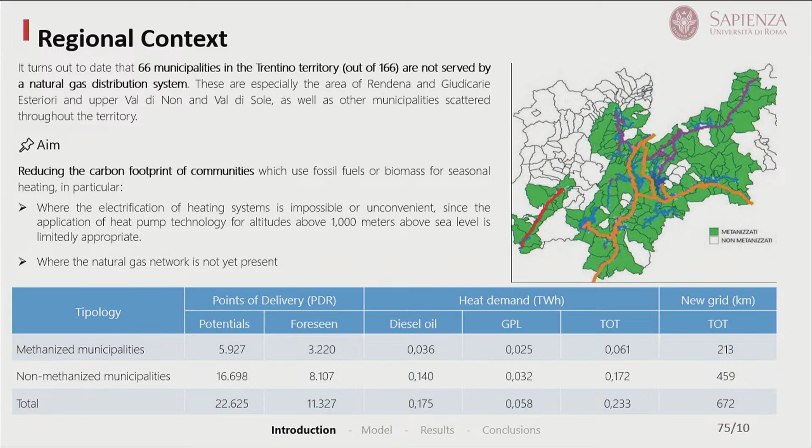So the idea was to try to examine the problem and try to solve it by using hydrogen. And then we started to make this analysis, trying to define different types of scenarios that could be pertinent to this type of problem, because in different town villages we have different problems.

So we started our analysis by examining the situation in Trentino, and together with the group in the province, we indicated 3 typical different scenarios that you can see here. I don't know if you see, okay. These are the 3 scenarios that we analyzed.

One is Peio, that is a small town where we have a number of different civil boilers, one per building. Okay, I don't know why it is going. I don't know if someone in the back is working on this. And in this case, the idea is, let's try to understand if it is possible to generate a grid, a hydrogen grid, to feed all the houses.

In the second case, we worked on Ronzo Chienis, that is another small village where there is a small network of natural gas, based on the use of liquid natural gas and then passage into the grid, where we examined the possibility to implement a sort of blending, 10% and 20%.

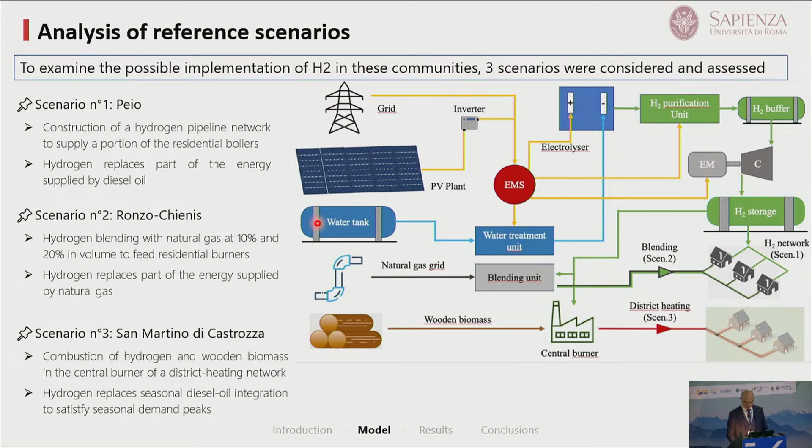We developed a model, a tool that was based on the implementation of a photovoltaic plant and a station for production of hydrogen and storage, together with the final uses. The idea was to try to establish preliminarily the demand of hydrogen in the 3 different configurations, and we did this starting from some raw data based on the use of the fuel in these 3 different scenarios. It was a long work just to extract and manipulate this data.

And at the end of the story, we understood that for the 3 different scenarios, we had different requirements in terms of hydrogen in tons per year with a different coverage. In none of the cases did we substitute completely the existing solution with pure hydrogen, because otherwise it could be very difficult to find the total amount of hydrogen.

So here you can see a number of relations on how we understood the need, and also how we produced the hydrogen. In the basic scenario we worked by using a photovoltaic plant, an electrolyzer, a low pressure buffer where we stored the hydrogen for the daily production, a compressor and high pressure storage, and finally end users.

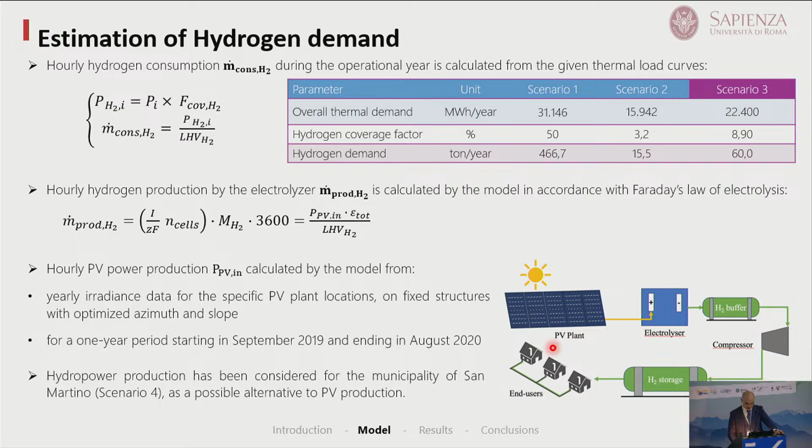In order to understand really what is the real need of hydrogen, and especially in order to understand how big should be the storage, we decided to develop a tool that was able to take into account from a dynamical point of view the production of hydrogen and the consumption. Of course, we can start just saying, okay, during the year I need 1 ton of hydrogen. I produce 1 ton of hydrogen, store it, and I use it during the year. But in general, we have a continuous production, continuous consumption.

So it is possible that the maximum amount of hydrogen that I have to store is not as big. So the idea was, okay, let's try to compute something using a time-dependent tool that is able to take into account the radiation that we have on the soil, and the production, and finally the end users.

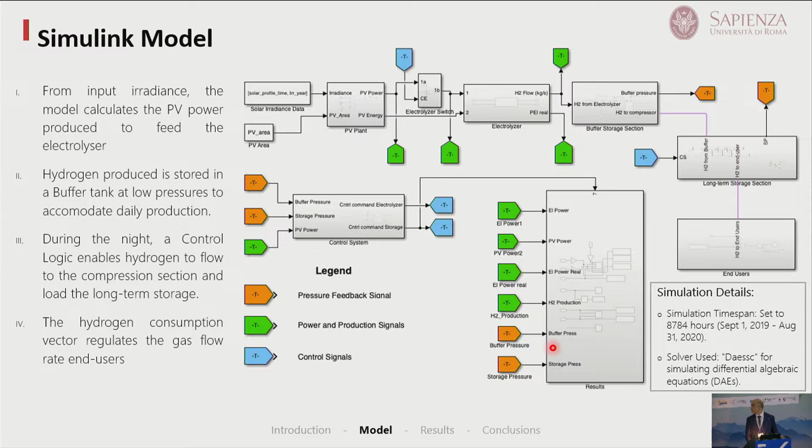So we developed this code in MATLAB Simulink, and on the basis of this, we were able to understand the characteristics of the different scenarios in terms of dimension of the power plant, the photovoltaic plant that was needed to be used, and also the capacity and the dimension of the storage.

It is possible to see immediately that in the first case, where we tried to generate hydrogen for the network, the quantity of hydrogen that was needed was really too high, and it was out of the possible application, because there is really a problem of producing a photovoltaic plant so big, 21 megawatts, but also to have this so big storage of hydrogen.

I see someone from the fire brigades here. I imagine that they are quite worried about this quite huge amount of hydrogen.

But at the end, what we have seen is that for feeding scenario 2 and scenario number 3, it could be a possible solution, provided that the local conditions were sufficient to support the economic effort. There is a big problem, and it is something that I want to point out. I discussed it with all of the people this morning.

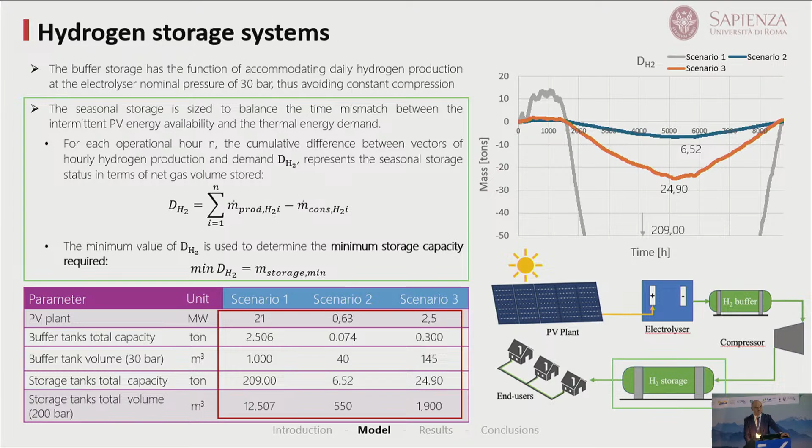The real problem is the use of an electrolyzer that is directly connected to the photovoltaic plant. If we do this, our photovoltaic system will work for a number of hours that is quite low. So we have very high capex cost. So we decided in a second step of the analysis to try to feed the electrolyzer also with some part of the

hydropower. So we examined 3 different configurations where we considered using part of the electricity coming from hydropower by assuming a number of different modulations based on the cost of the megawatt, the so-called PUN, prezzo unico nazionale, a unique national price of the electricity. When this PUN was above the threshold, all the production was given to the grid. Otherwise, part of the production could be used for producing hydrogen.

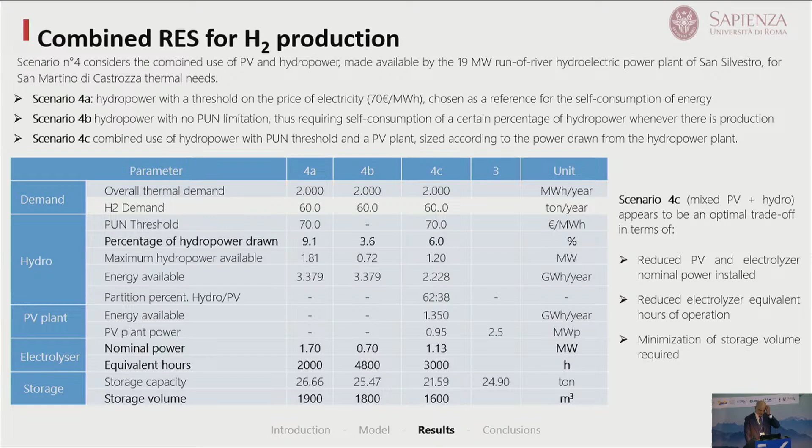So we analyzed a number of configurations, and what we have seen is that we were able to work in a more proper way, with use of the electrolyzer for a longer period. And so from this point of view, this solution could result in a better solution. So I don't know why it is this. Here we have some results that are related to other, let's say, emission scenarios and costs.

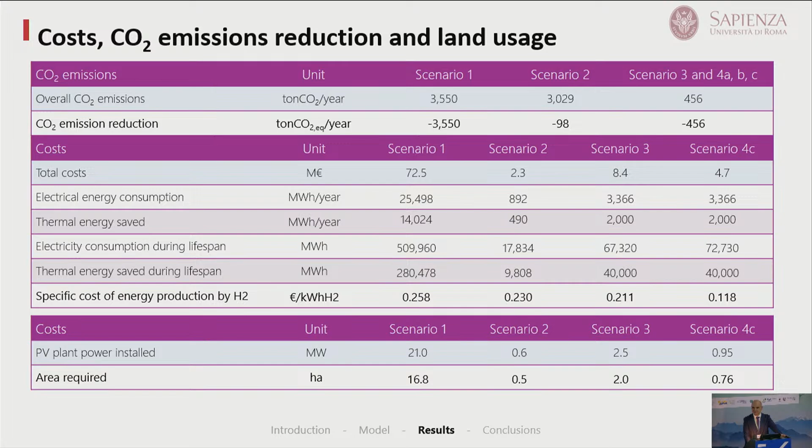So what we can say is that we analyzed the feasibility. We have very interesting results from our point of view. We developed this model that could be used in a huge quantity of applications. And we have this control logic algorithm that is able to take into account how to modulate the production of hydrogen and the use of the renewable sources in order to optimize costs and minimize emissions.

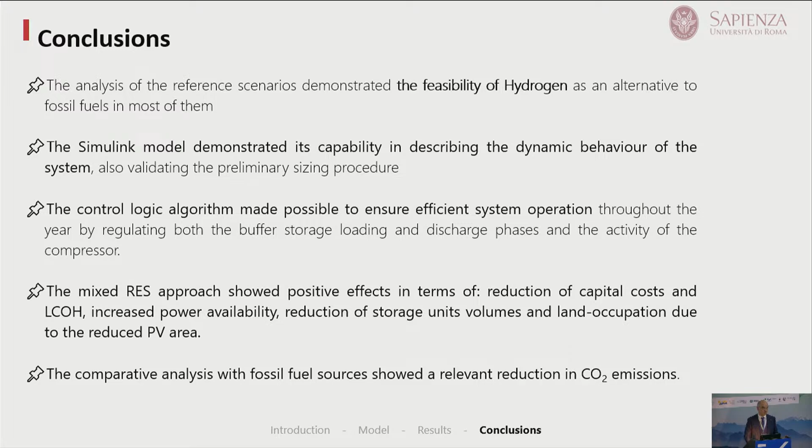I just want to spend a few words on the outcome that we have from this project, because after the development of the model, we understood that we probably also need an improvement of our model to take into account the problem of transportation of hydrogen, especially if we are considering the existing pipelines, where one of the big problems is that, of course, hydrogen has a density that is much smaller than natural gas.

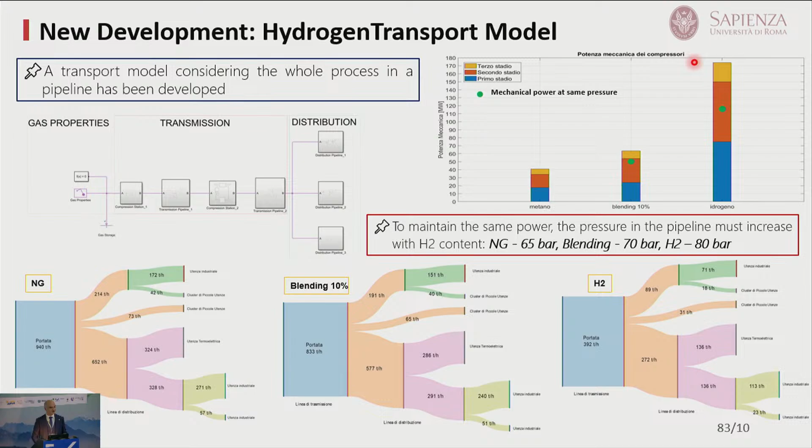But what I would like to point out is the increase in the power of the compressors related to the passage from natural gas to pure hydrogen. This is the blending. That is quite high, related to the fact that we have to increase the pressure, and also that it is much energy consumption. We have a much higher energy consumption if we pass from the natural gas to the hydrogen. So this is just to give you an idea of how this power increases.

And finally, I have also the final application of the integration of the 2 models. We did a preliminary study assuming that we are producing hydrogen in Africa, in Tunisia, and we bring hydrogen from Tunisia through the South Corridor to the Taranto steel making. We analyzed all the process starting from production, transportation, and final uses, and at the end of the story, we extracted the levelized cost of hydrogen from this type of solution.

And what we can see is that we obtain something that is closer to €6 per kilogram of hydrogen if we produce hydrogen from green sources, and this cost is lower, but not so much lower, just half more or less, if we produce using steam methane reforming. This is something that we have already developed, we are testing, but it is almost finished at the moment, so it is something that we are interested in. So I can stop my presentation. Thank you very much.

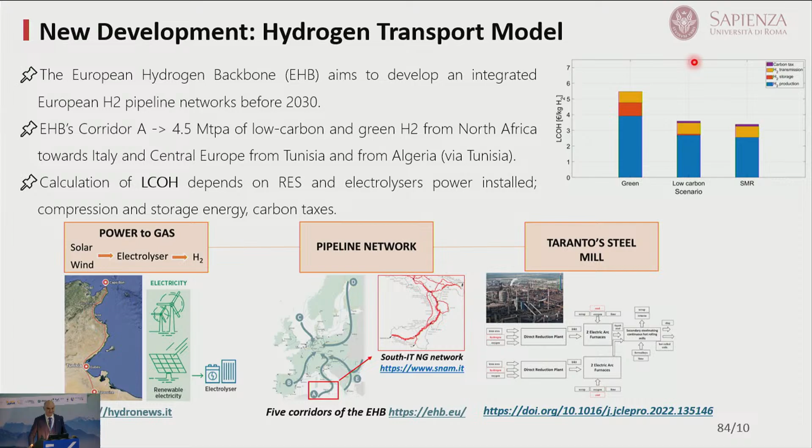Pausa caffè? No, of course, if you have questions, we can discuss at coffee break. No, we were just joking. There is no coffee break now. It was just a trick to see if you are still alive.